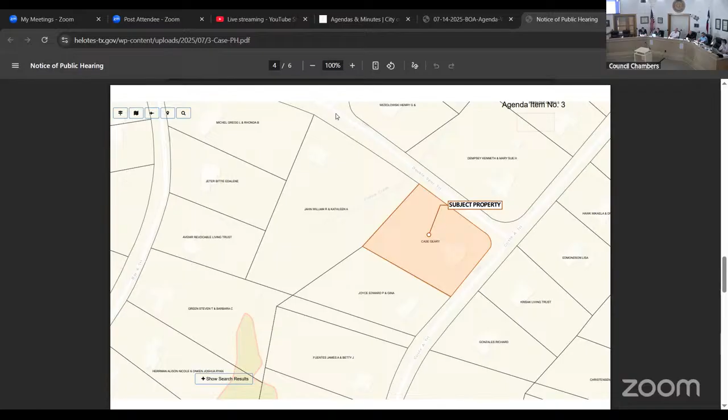Why don't, I would invite you to come up, state your name and address, and basically just tell us what it is you're doing and how we can help. I am Geary Case, I am the homestead owner and trying to get it finished to actually move in with my soon-to-be wife.

And I spent a lot of time there. It's 14111 Circle A Trail. So I see most of the city, I think, go through the road next to me with the detours. So I have a lot of visitors and drop-ins.

So I'm trying to bring it up to the current codes, because it's been there a long time. And I've done a lot of improvements to it that have been run through the board. My friend over here, Kenny Garcia, is the general, so he's helping out immensely. So that's roughly what we're doing.

So I'm just gonna kind of read it for the record. Discussion of an action on the request by Geary Case for a variance to the Municipal Code of Ordinances, Chapter 98 zoning, Section 9862, subparagraph C1, front yard setback, authorizing an encroachment on the required front yard setback of 40 feet on a single-family residential zoned lot located at 14111 Circle A Trail, Helotes, Texas 78023, more particularly described as BCAD property ID number 242598.

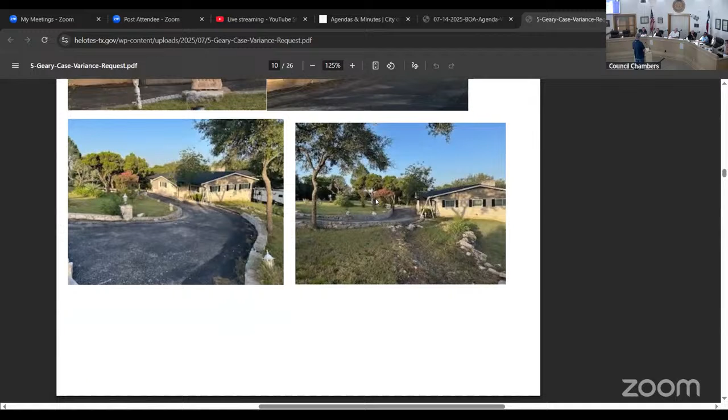I recently had a visit from SAWS, where they were coming in to do water metering, the meter installation. Unfortunately, their contract crew blew up the box, literally, because they were power washing it, and it disintegrated. And that was my box and my neighbor's box, a box about this big.

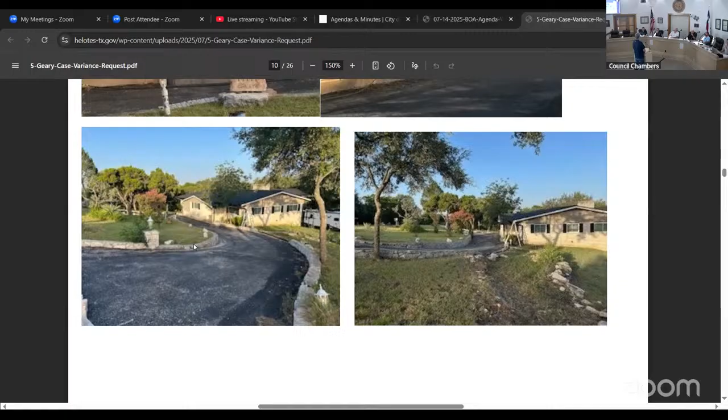So after about two months of discussion with SAWS, back and forth, I finally had a superintendent of installations visit me one day, and he procured a box. I'm not sure where the box came from, but it was a water box. And we got that put back together.

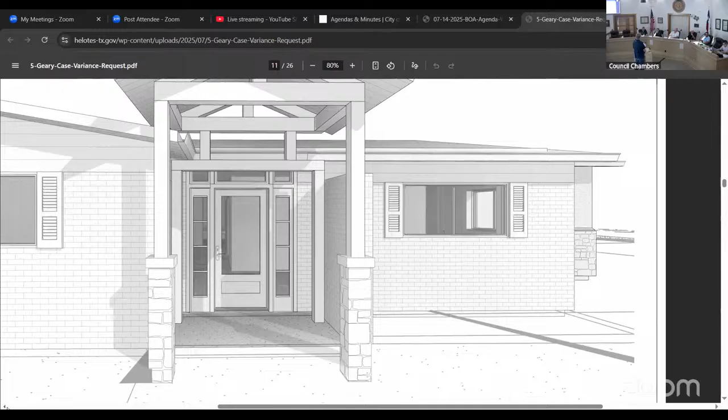After that, I was ready to go ahead and start having the system monitored for a while, because SAWS had put out some guidance that if you have old water systems, you might want to check them. So I had a reliable plumber come out and do that.

For the last couple months, we've been replacing every pipe in what was an underground system all the way, putting it aerial. So now we're ready to go ahead and do the other 2 rooms we were talking about.

Okay, roughly. So, as I understand it, you're looking for a variance to a front yard setback, because I'm looking at the architectural drawing. Yes. So it looks like you're basically kind of extending your entryway out.

Yeah, so if you look at the photo that's up there right now, you're gonna see this is what the existing plan looks like. We're basically gonna focus on the area here by my cursor. You're gonna see that it actually says 36 feet 1 inch, okay? So this is basically our property line, and based on what was submitted by the applicant and the contractor, they're saying that when they purchased the home, they were already under 40 feet, okay?

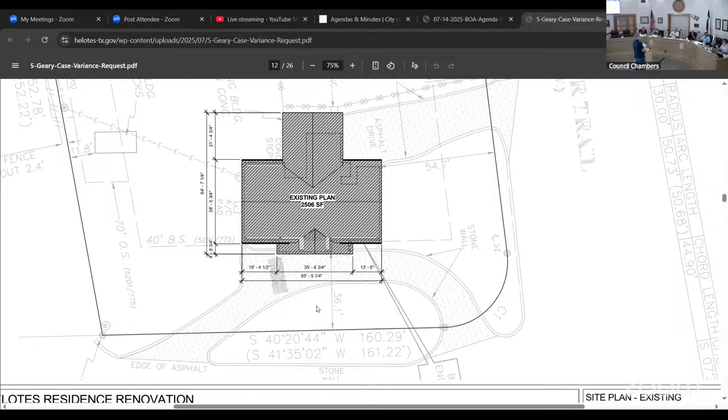So staff has diligently looked for a detailed sheet for this property. If you look, one of the pictures I do have is actually part of the plat. Forgive me, let me get to that page real quick. This right here - this is the area that he lives in. We've looked, because today's plats already have the setbacks written in there, but this was like 1960-something, I guess, right?

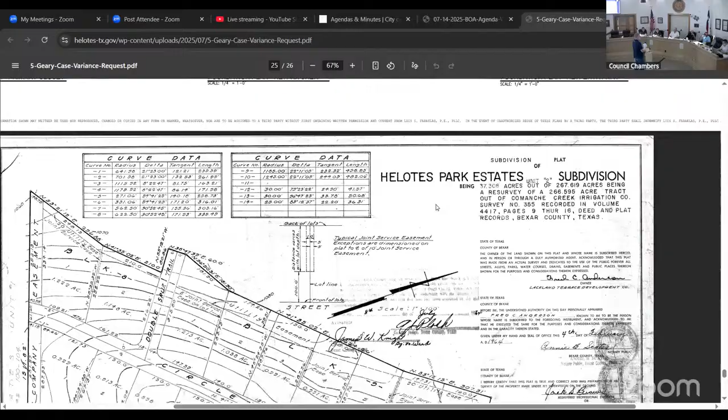So along with this sheet here would have been an additional sheet that would have had details, and it would have told you what the setbacks were. So we don't have that, and we haven't been able to locate that, because it could have possibly said that it was already at 36, or maybe 40 - we don't really know. So to his point, they're starting out with the assumption that it's already at 36, already under the 40, based on the prior builder, okay? I just wanted to point that out real quick.

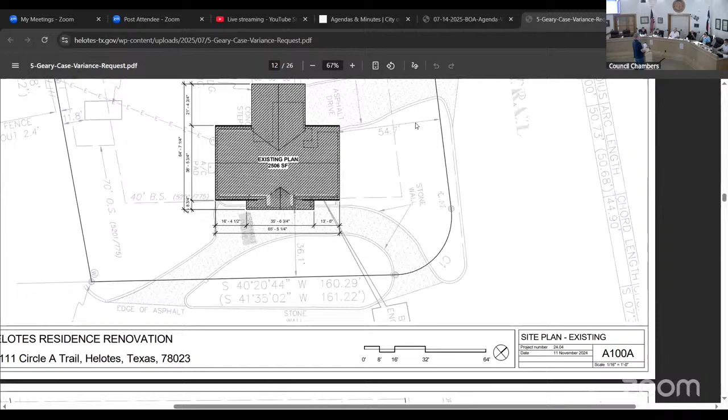Thank you. The home was built in the 60s, correct? Yes, correct. So that part of the structure, I guess, would be grandfathered now. Okay, right. So it's just something to take into consideration when making the decision, right? So if you look at this aerial view of the existing plan, you're gonna see this is pretty much what it looks like.

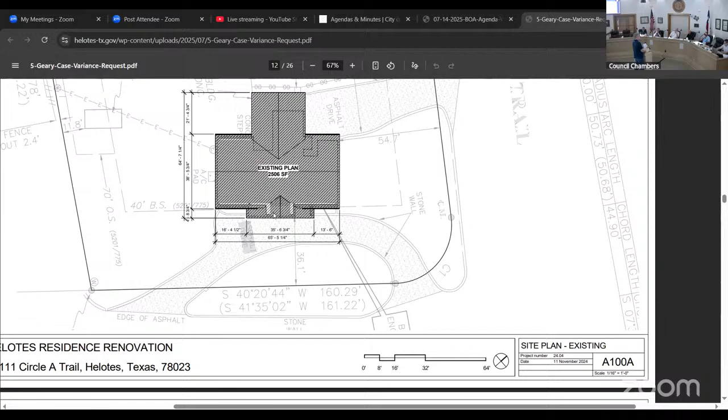You're gonna see that it says 36 and 1 right here where my cursor is. Let me know if I'm going too fast, I know it's kind of hard to see sometimes. Are we looking at the front of the house? Yes, right here where the cursor is, from the street. So this is the street right here, and he has a circular drive. Let me make it a little bit bigger.

So if you move on to the next thing, this is the renovation plan, and you're gonna see that it extends right here. So it's gonna encroach a little bit further than the 40 already. Again, we're under the assumption that it looks like it was only 36 to begin with, right?

And for the record, the only discussion agenda item is that new vestibule or small portico. It's literally this little section right here. Side setbacks are good, everything else is fine. So we're not moving the whole front of the house? We're just moving the porch entry. That's only what I think it was saying.

It's extended, and it's difficult to say exactly, like it's exactly 2 feet 11 inches or so, based on not having the prior knowledge of what the survey or property line proposal was originally. I believe the porch was originally open. I can show you some of those photos.

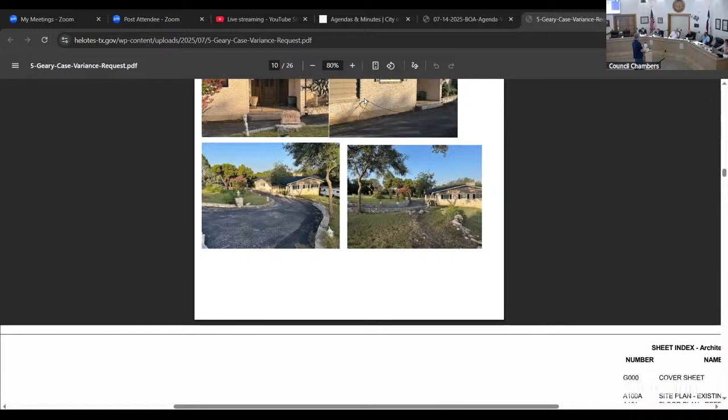Right now, what is the current distance from the porch to the street? Well, I'm hoping the contractor could clarify that, because if he's already at 36.1 and he's adding, let's say, 2 more feet, then it'll be, you know, 34? Okay, can we invite the contractor? I think that'd be absolutely fine, but did anybody have questions?

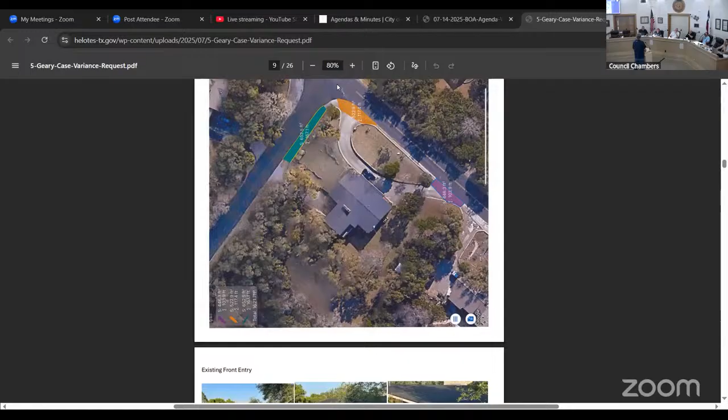Did you not have, how long have you owned the property? 2 years sometime this month. You got a survey when you bought the property? I had a surveyor come out because there was no survey available, so we bought it mostly as is. And we've been in the state of discovery, because...

When we started out, we had a house that had a gas water heater down in the laundry down below. It was just about lost. In the kitchen area, there was a 20-gallon electric heater, and that's where most of the heat came from for any hot water. So in the process of repiping everything, we pretty much re-engineered the water system.

The surveyor didn't give you a boundary survey when you bought it? Yeah, the boundary survey, but there's not much on it. It didn't mark the corners of the house or anything? Were you talking about that, not knowing if it's 36? Yeah, the boundary should show you. I'm assuming that they utilize this, like part of the survey, to create the rendering. But I guess the contractor can verify that.

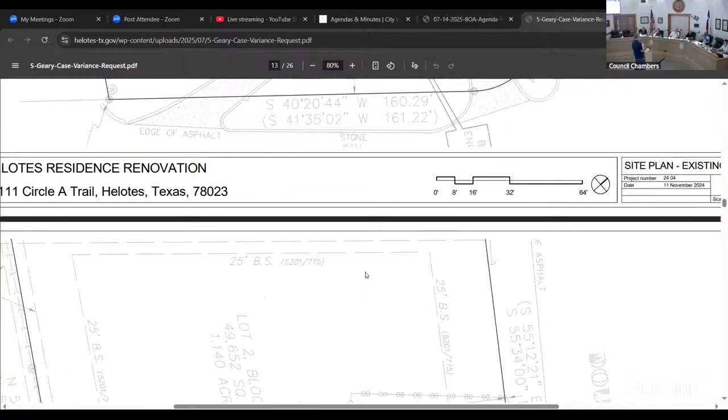So, I don't know if I'm jumping too far ahead, but what is the point of going further out? Is it usability, is it aesthetics only? What are you gaining from going further out? I noticed in your application you said you're okay leaving it as is. I just want to know if there's an accessibility issue, constructability issue, what is it that's causing you to want to? Probably a little bit of all of those features.

At one point, they've done a roof replacement. I'm not sure which one they did or when they did it, but they covered the porch that was originally open. I think it was open because it had lattice. So they brought that out, and you can see in the drawing. The drain structure of the roof was altered, and that goes with some of the height adjustment. They were talking about raising the height and had a rock ceiling at one time.

So they did those adjustments during that period, and they covered that roof. And originally, that roof, if you look at the front door, you can see where the opening is. They brought that roof straight down, and it actually cut off the top right-hand corner of the front door. All that wood is still up there. And the roof used to go from the right all the way to the left wall and come out, because that was the drain system there. So part of the roof structure, they modified the draining structure.

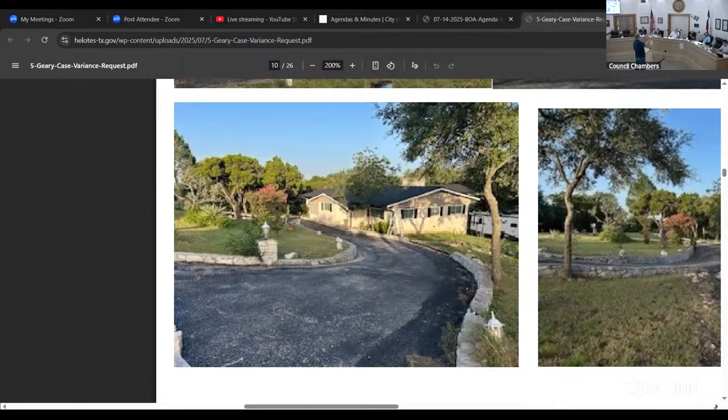One of the reasons the draining structure doesn't drain correctly is that, all the way to the right, the dirt is above the level of the floor. There's about 8 inches of dirt outside the bricks going into the dining room, which I discovered when I started taking the floor up because it had an odor from getting wet.

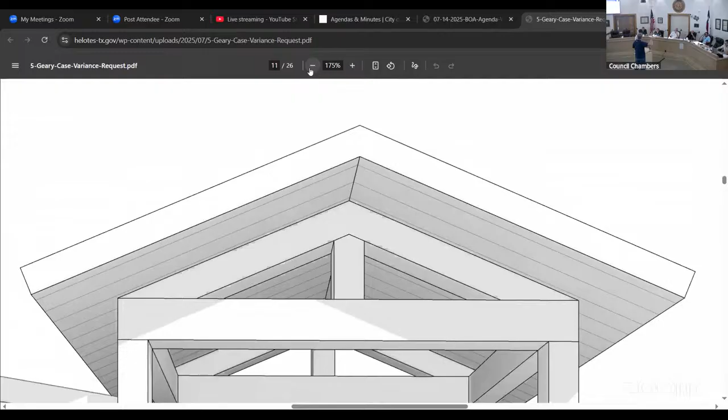So one feature is to put the drain back like it used to be, and put the other structure in, similar to what you see all over town, mostly in commercial places, but it's just a small lift. You extend the roof out, put drainage up there and underneath to catch the water coming down, and re-vent it to where it needs to go. Otherwise a lot of the rain runs down the street. There's a culvert at the end of the house that goes all the way down to the end of the property.

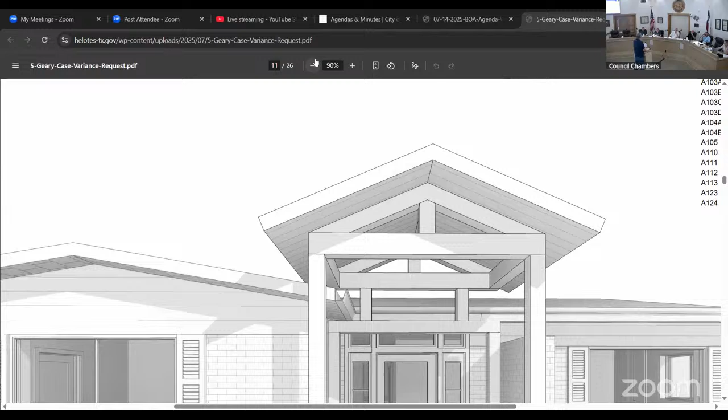So it's really two features. One, to make it look prettier, and nobody's had a problem with that—they all like it because it's different. Two, it fits right into the structure like it is.

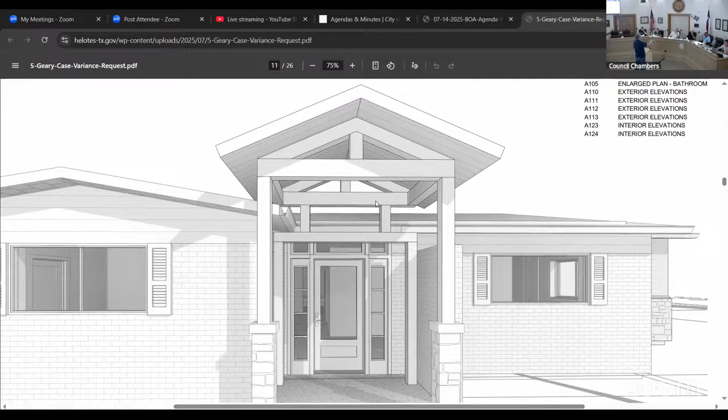So we brought it out to the front to give it a little feature and move it 2 feet out into the street. It's a little tight there, but it's holding the front part up, and the back is going to come down in the existing patio and be supported. We moved the drain structures in so you can support the roof without having to tie it all the way into the house, but it is tied into the right side.

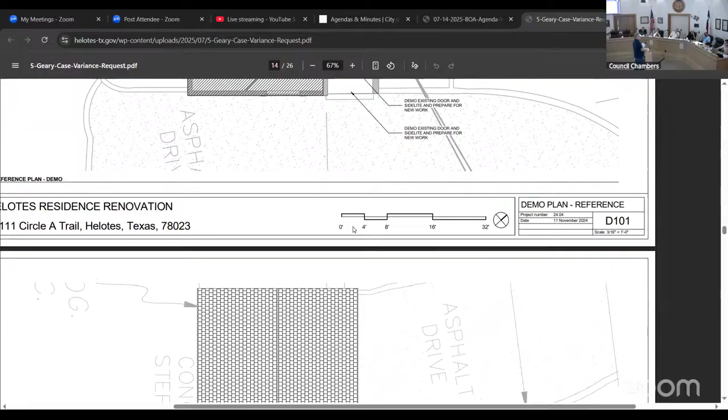Michael, can we go up a little bit? Right there, that's good. So if you build this as proposed, how far into your driveway is this going to extend? Two feet—well really, it's about a foot and something, because the drain will go back behind it on the left side. On the right side there'll be 2 places it drains out, going straight down, then into the existing driveway, and it exits down on the left side of the property.

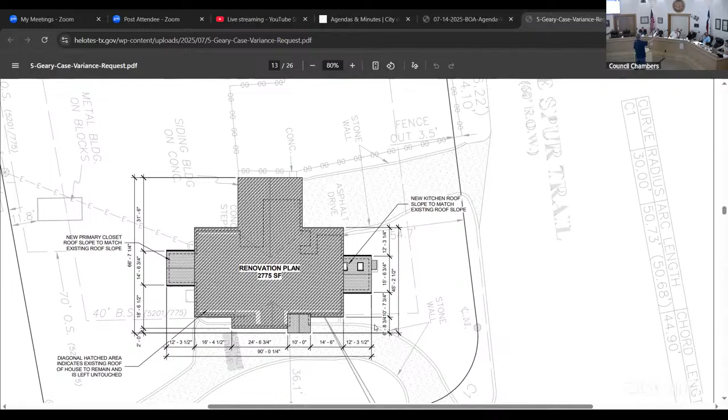There's a history with the property: on this left wing at the front, that's where the water used to go. The water went from 60 feet in the left-hand corner all the way across the rock banks and down, coming in the front, where the only hose bib on the front of that house was. It was also where the water came into the house. So as part of all that, all the plumbing that was in there in iron is now capped, and everything is run up.

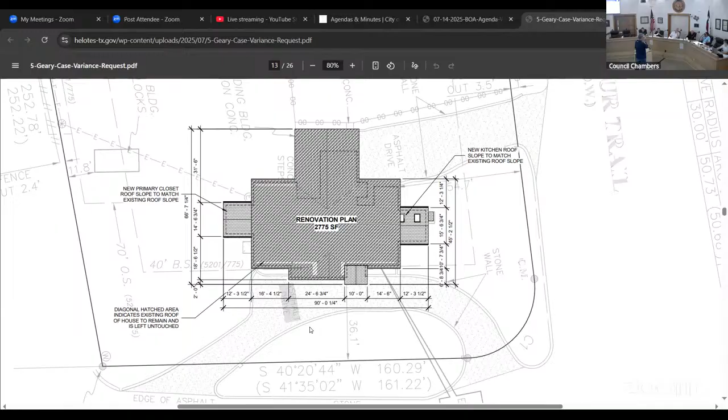So just to capture some detail, I think the last drawing in the group is the topographical map. This property—if everybody hasn't been by it—the front street is much higher than the property itself. The driveway drains all to this entry of the house, and it has rock walls on each side of the driveway that carry the water that direction.

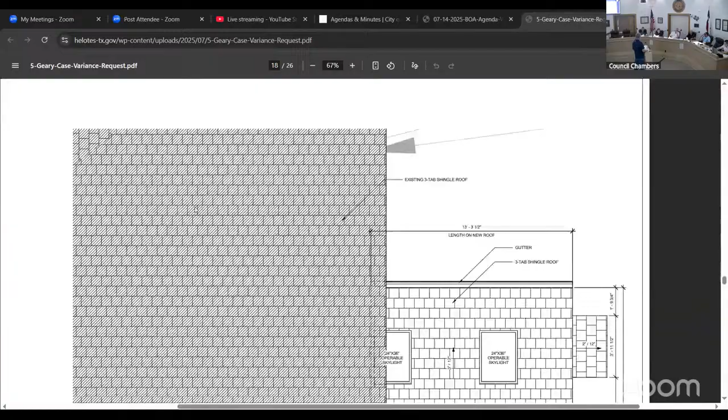The property continues to drop in elevation as you move from the front of the house to the back, and the change in elevation is 1.5 to 2 stories by the time you get to the back of the house. It's real dramatic, the drop off. So you can see why the original house was pushed so far forward on the property.

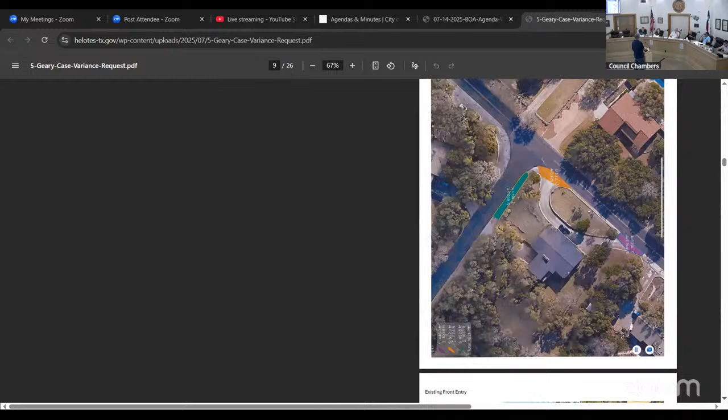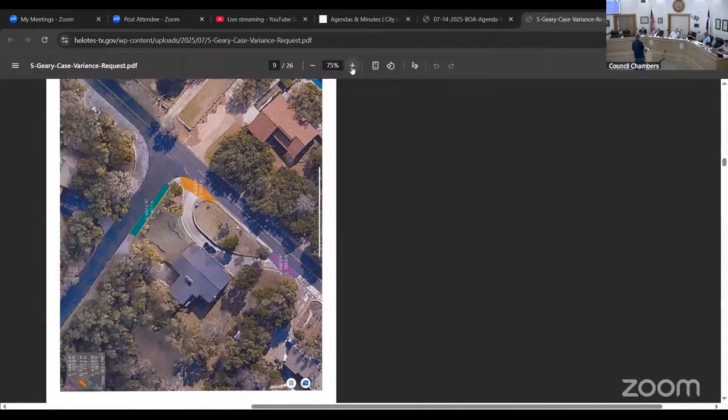The house doesn't have a pantry—never had a pantry. I think it had a room that served as a pantry in an adjacent part of the house, away from the kitchen.

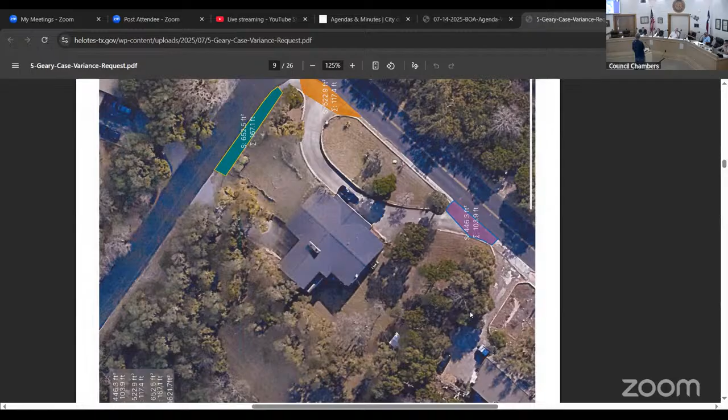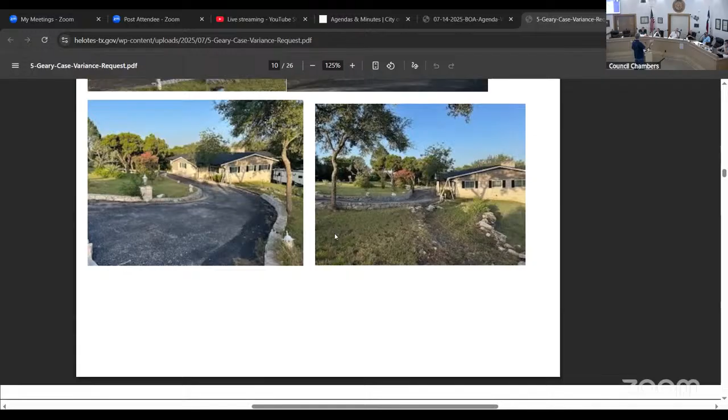The water heater is all the way down in that back area, so all the water had to come up a story and serve it, which most things this type now would make that, or they put enough pressure in it. So the house has been literally 100% replumbed, and when we get to the 2 new rooms, they'll be plumbed from the same system. It's all brand new.

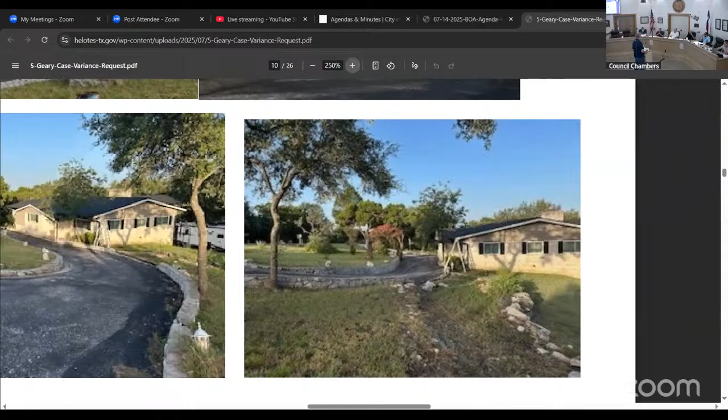Okay, do we have any more questions? Just one follow-up—through the images I can see that architecturally you've done something here that's aesthetically pleasing to most people, probably. I like the way it looks, but my peer asked about accessibility, future access for elderly, things like that.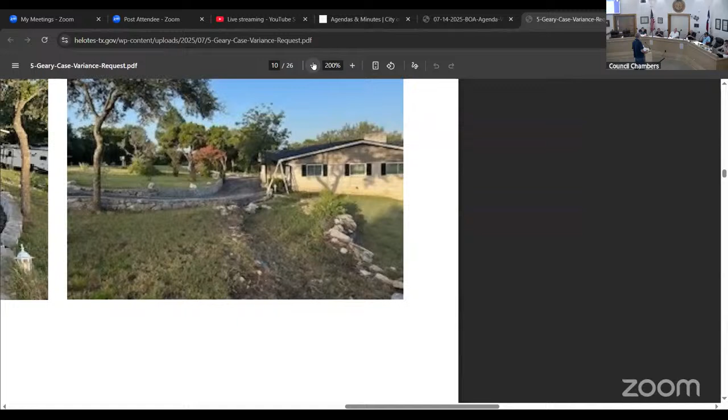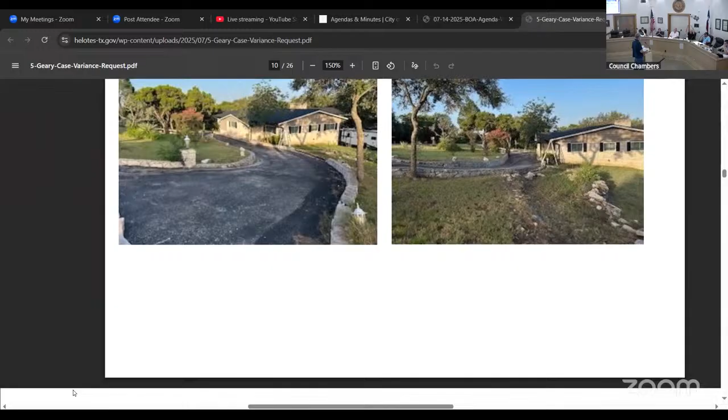You did mention that—it's a little bit of all of that. I can see that the front posts are pushed out about 18 inches from the existing patio today. That's the only piece of the structure that touches the driveway, those 2 posts. And the roof ahead seems to be so far up, it's not going to get in the way of vehicles coming through or anything.

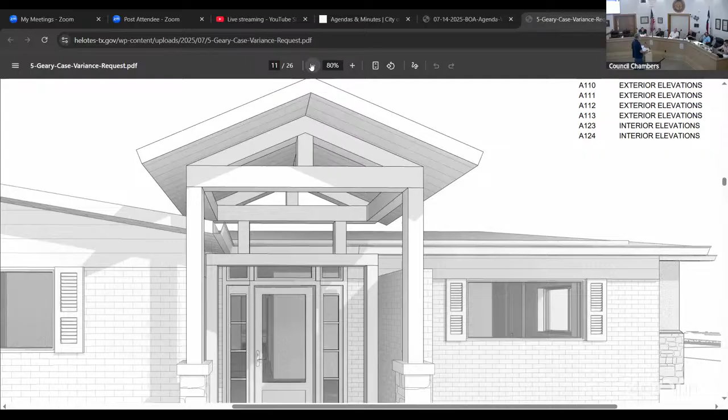The question really is, do you feel like that new structure will give you better access in the future, or give visitors, possibly wheelchairs, more room to move within the front of the house to gain entrance or exit? In the process, that's one thing you haven't seen drawn yet. There's one step built into that.

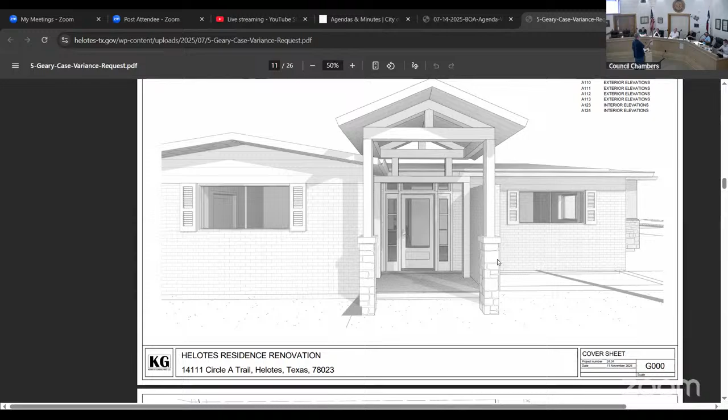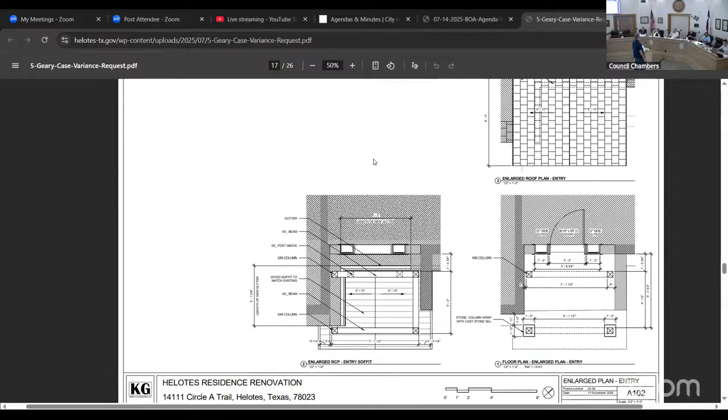Bringing it out to a second step would give more access. Plus, it can be modified with ramps, so the inside of the house has been modified. At the back side of the house, there's a very narrow stairwell that goes down to the carport area. That's all there is in there, and its only purpose was to come up, and it's got a locked door which needs to come off.

So this is the main entrance and exit from the house today. There are two others when you get into the living room, because the living room and the master bedroom both have access to the back patio and the upstairs and downstairs.

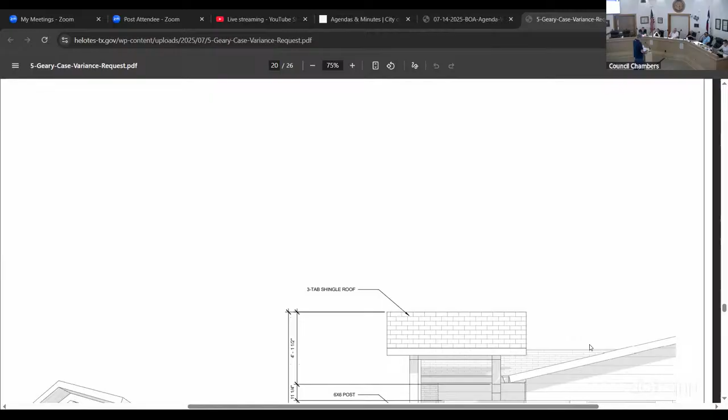So there are more ways to exit it. It's not the most convenient. How wide is the driveway? That driveway is about 10 or 12 feet, let's call it 12 feet. It can be tight for a big delivery truck, with the trees and everything else — you've got to navigate your way through it.

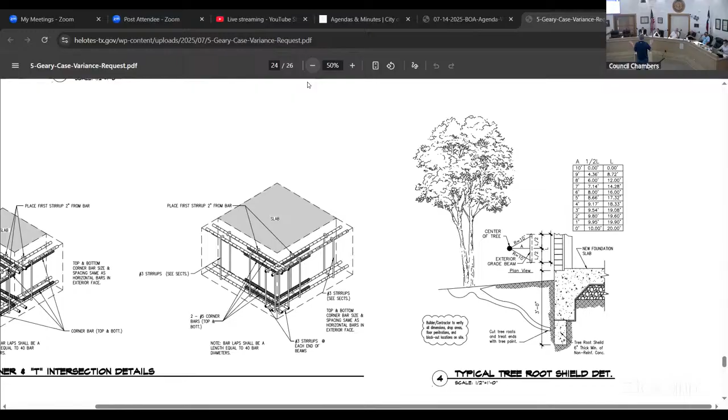It's accessible. There's two ways, the 2-lane wraparound.

In the event of an emergency, have y'all verified for, say, an ambulance? I know a fire truck wouldn't have to get that far down, but if that's the main entrance, it didn't appear in the pictures that there was any real accessible area to the other part of the house. Is that gonna cause an issue trying to get an ambulance that close, or would first responders have to go from the street a lot further up and back down?

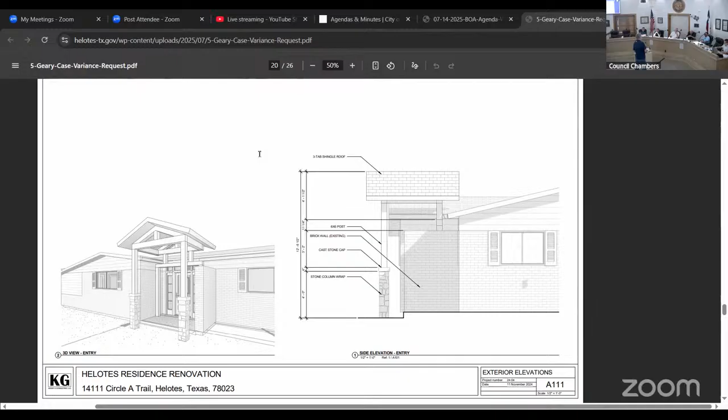Well, at the second level, you've got a double wide entry. Yes, but to get from the ambulance and gurneys and everything into the house, has that been considered in this? That's still gonna be something that can easily be done?

Can I say something? The ambulance has been down there when Charlie Garcia lived there. He had his heart attack and the ambulance was down in that house.

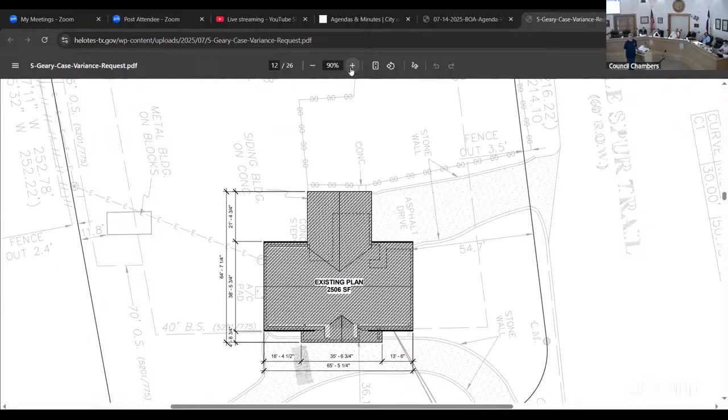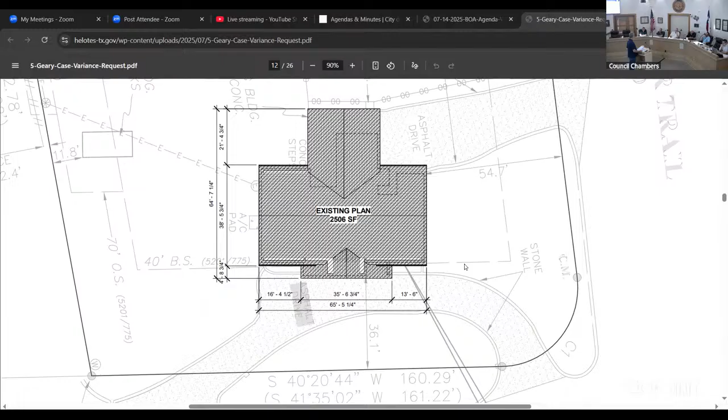Okay, thank you. There's room to adapt that entrance. I would be happy to adapt that entrance, simply put, because it's not the most convenient driveway. I know from the Garcia family, they had lots of visitors all the time.

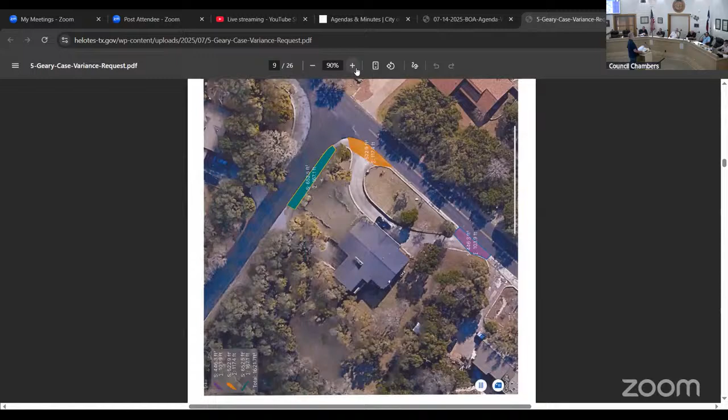One thing I did do was — the purple area, the orange area, and the green area — those are the easement areas. They were dirt, and all of those areas had 1/8 of tar on them and then gravel.

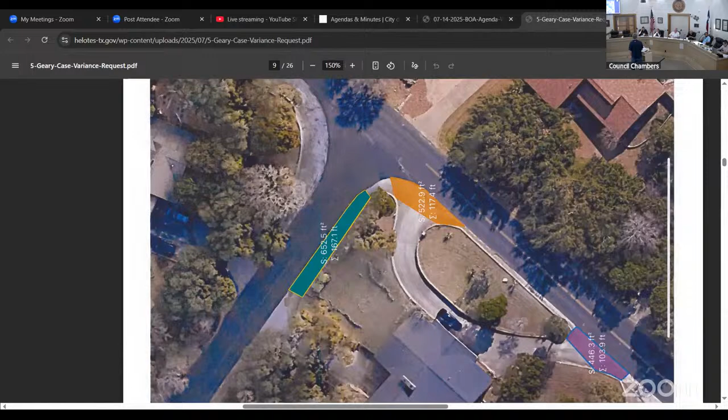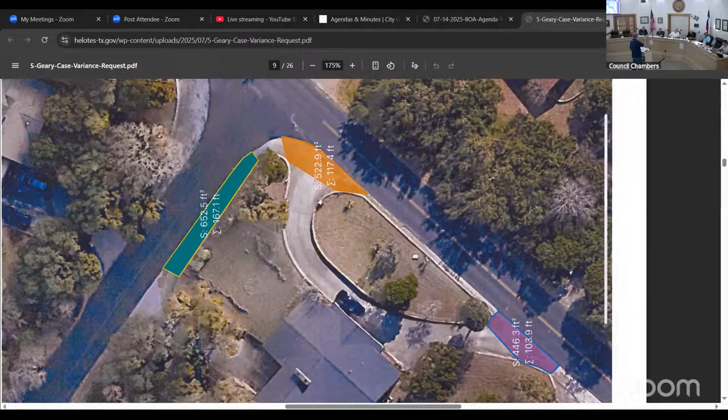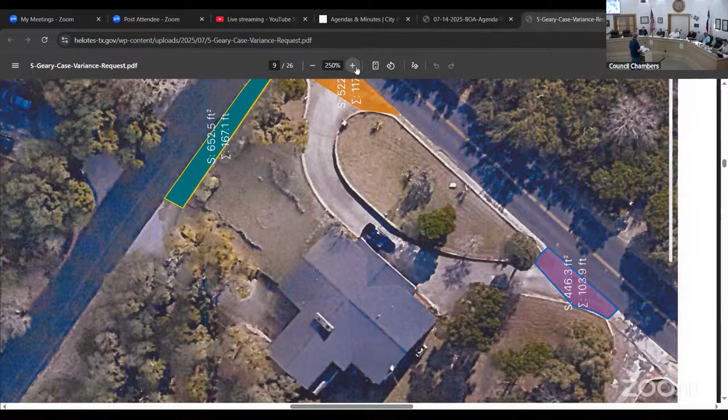Which I believe everybody is happy to see, because it makes it easier — easier for the school bus to get around that goes around the corner every day. So it's very accessible. Only you can see the car — it's really a one car down in that level.

I'd be happy to knock part of that wall out and make it wider. But right now we're here arguing — graciously, but arguing — about the things that can make it better. So there's plenty of opportunity for that. It wouldn't take a lot, I don't think.

If you look, you can see where the pitch of that porch is, and it's already widened up on that. You come in from the purple angle. It wouldn't take a lot on that retaining wall, on that island, if you needed to do that — it'd be pretty simple. You'd raise it up above that, accommodating the way it was originally built.

And when they made the modifications, what you do is bring that structure up, make it a little deeper back in. It's not going to be attached to the roof — it's going to be over that roof.

Put in the drainage systems on either side, replace the drainage on the lower side, and then it's all going to run a whole lot better than it does. So that's the plan.

Any questions? No, okay, I guess we can just go and close. You guys gonna make a motion? If we could get a motion to close discussion, then we'll have to do another motion after closing. So, is there an opportunity for the general contractor to speak, or can we ask questions of the general contractor at that time still? You could do it now, prior to. Okay, thank you.

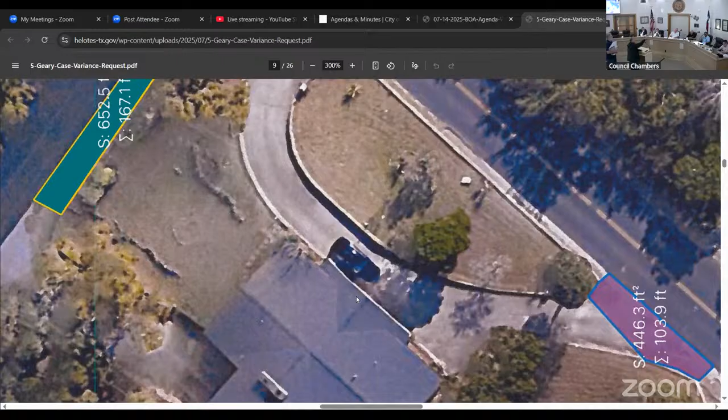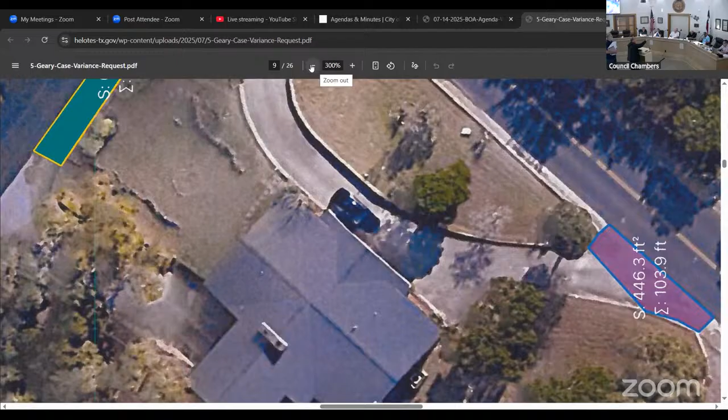If you don't mind, number one, if you see that black truck, I think that's an Expedition, you can see it's got pretty good width on the driveway there. But then number two, if you can go to the pictures of the house, the front door, the front porch.

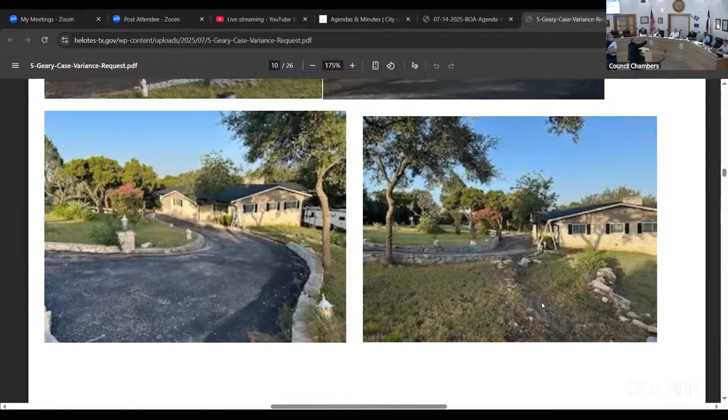Right, let me see, maybe one more screen. A little bit higher, if you don't mind, please. You can see right there by the front porch, the picture on the right, that the sidewalk - if you don't mind going down one, please. I think down one, right there. Here? You see that, it's already popping out.

That step, I'm just guessing 18 inches or so. So we'll be bringing it maybe 6 inches more than that, or we'll cut that out and support it structurally. But it's not like it's eating into the driveway - you're not going from the slab, you're going at this point. Right, like right now, the slab there is already, I'm just estimating 18 inches.

And if we're going 2 feet, it's - and add 6 more inches. Right, not a full 2 more feet into the driveway. So that's all I wanted to point out. And if you had any questions for me, I'm glad to answer anything.

Have you put a tape measure and measured from the end of that step to the street? No, sir, and I wouldn't even know the exact setback - when you say the street, are you talking the street, not the driveway? That's the difficulty here, is in that neighborhood the city-owned easement in the front is considerably wide. Right, and so the property line itself is typically 14, 15, 16 feet off of the asphalt.

But I think the setback should take that into account. So when we talk about 40 - right now we're talking about a 40-foot setback. The setback is measured from the property line itself back to the structure, and then in front of the property line the city owns a considerable right-of-way we don't have a measurement for. It's usually used for drainage and stuff like that in most cities, so it might be 55 feet, it might be 50 feet from the actual street. So if you have any questions, please ask me.

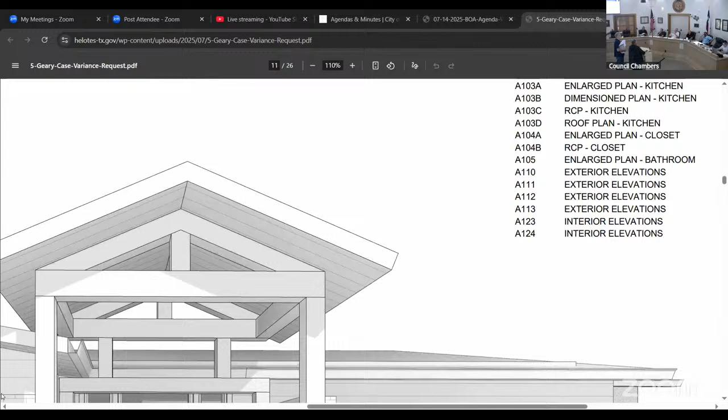How tall is that structure actually gonna be? Oh, I don't remember, I'm guessing about 16 feet, but I'm just kind of guesstimating, at its highest point. About 16 feet? Yeah, the front - it looks twice as tall as the front door, but I'm just eyeballing it, I don't...

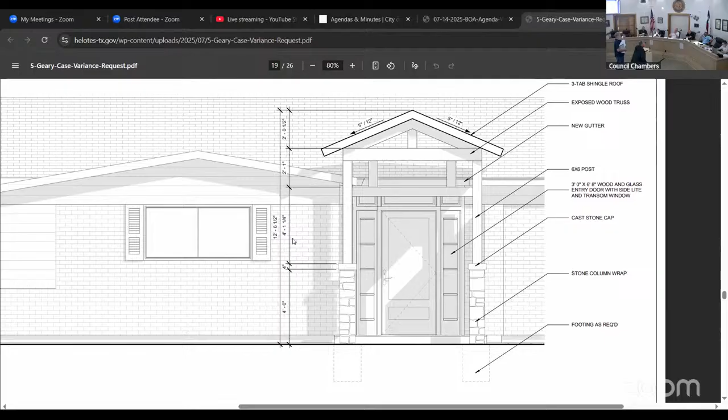The door is 36 inches wide, built in the 1910s or so, it's a single pane, quite old. And at the top, does it show it? Right there - at the top of the door, the roof framing starts there. We initially wanted to bump it up a little bit, but I think you probably have about 6 inches, you could add another window there if anything, but it looks like that's it right there.

Can you see, is that 17? 12.6. That 12, what's 12.6? Plus 4, or not? No, that should be your total. 12.6 - this is showing total, yeah, so 12.6.

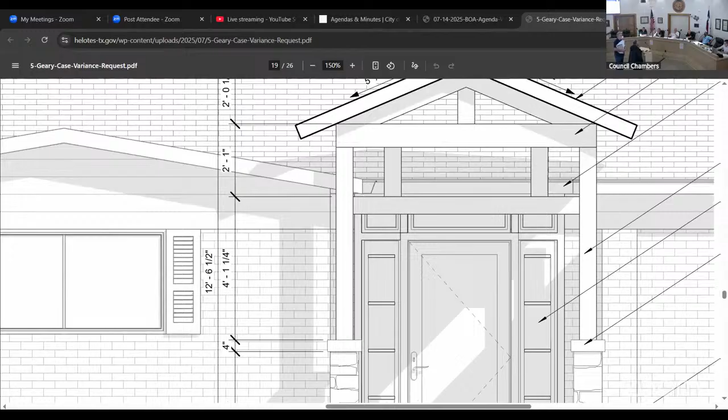So it's not even going above the peak. Scroll up a little bit, you can see the top of the roof. There you go, yeah, it's below the peak of the main roof. Correct. So right now, it does not exceed the peak of the house. Yeah, right, just that area.

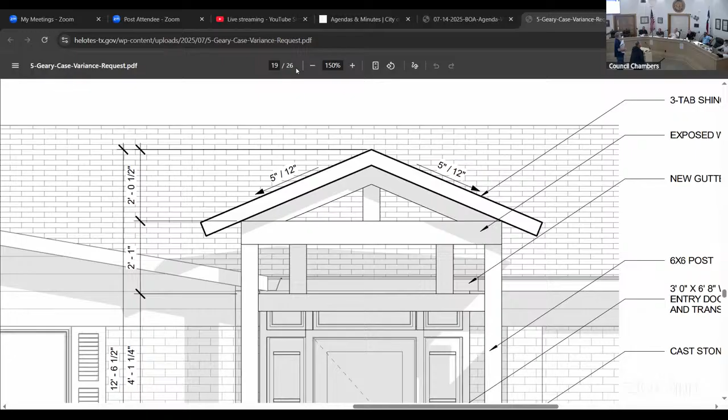I mean, it can be adjusted. The concept was to try to do something about this and get the drainage. You can see where the roof starts, the draining coming back over right above where he is, right to the left there. Yeah, so I can see the existing roof line on the older part of the house.

Yes, gutter in the front, and gutter that's going back near the door. And gutter cutting across left to right, because the gutter to the right going across used to go all the way across and come out. And so the new design, did I hear you correctly that the two vertical supports in the very front

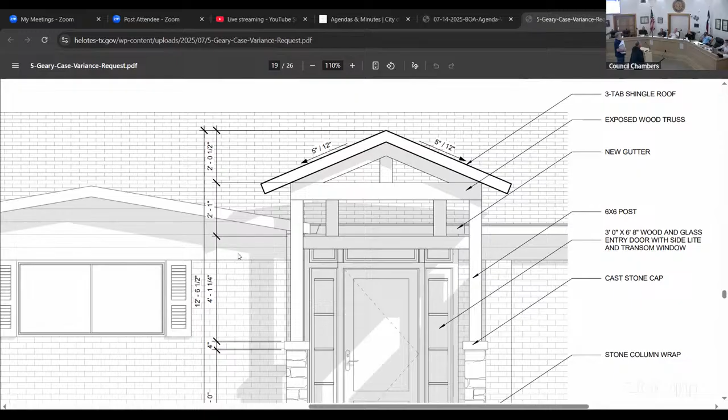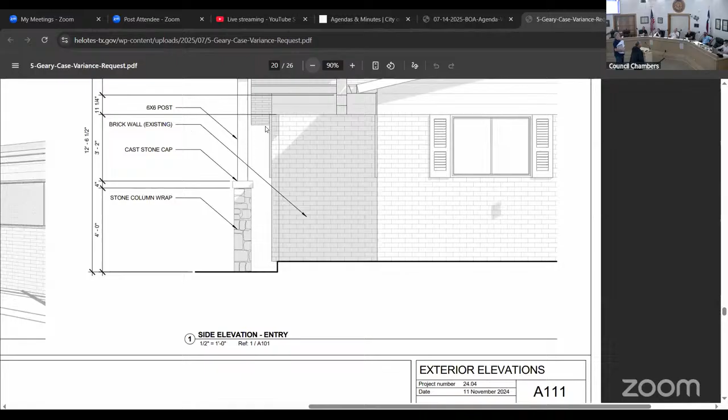I think I've asked all the questions I had. Okay, I don't have any. Thank you. All right, thank you very much. Thank you. Okay, so we can go ahead and close the discussion. Motion to close the discussion. Second.

Okay, can we get a motion to open to discuss amongst ourselves? Motion to open? Second? Okay. All right, let's just kind of go around the room. We'll start here. Just talk, what are your thoughts?

I'm looking more at drainage. If it's built for drainage, I can see how that could be positive to change that up. So that's kind of the thing I think is the most important part of that. Yeah, I agree. I think it addresses his drainage issue, which was obviously something done before he bought the property. I think it's aesthetically pleasing.

He's got his neighbor here who's gonna see it, and I think it looks good. And to the contractor's point, it's only bringing out those posts another 6 inches or so. I don't really have an issue with this at all.

Sure, yeah, I'd just parrot the same comments - with the local neighbor who's been there so long and no one else responding negatively, you've got support in the neighborhood here. And again, 6-inch movement on the base level, and the overhang is way up there. I don't see where this is gonna cause a problem for anybody. And I don't think we're setting a crazy precedent by saying, hey, you're asking for a 6-inch movement

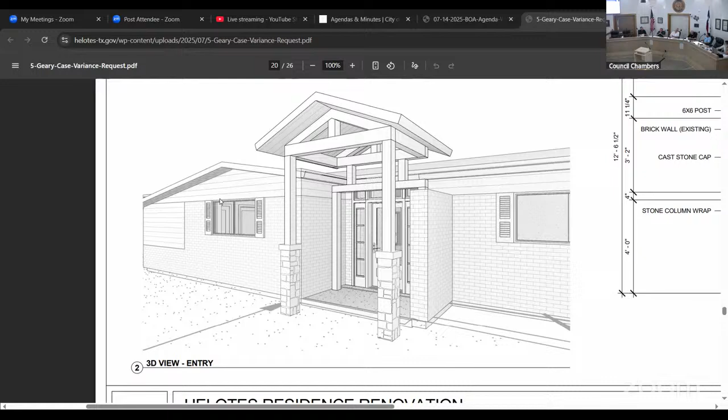Well, that's the question. So again, how wide is that driveway? I mean, we're just estimating like 12 feet. I don't have any exact measurement. Okay, 12 feet. You said 10 to 12, right? I'm so sorry, I think earlier when I asked the question you said 10 to 12 feet. No, I think... Okay, you said that. So let's call it 12 feet. Did I make a mistake?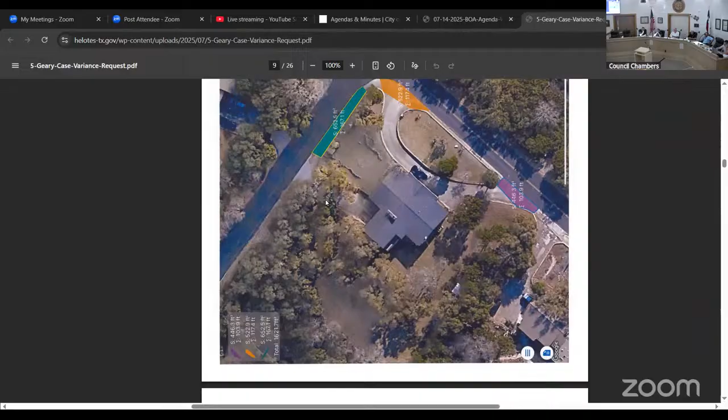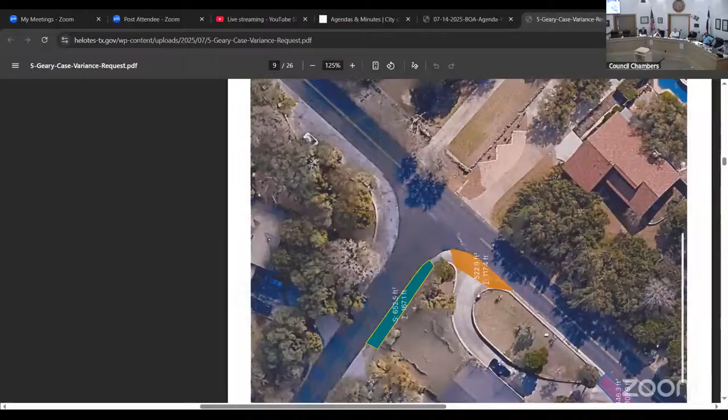I would love to widen that by taking some of the distance between the uphill part of that to the street. In other words, squeeze in, to your point about a drive-through, or at least something wide enough to get another vehicle in there. I'd be happy to do that and just build a sidewalk up to the street. Okay.

So the question is, do we want to approve, how much of a variance do we want to approve? That's ultimately what it comes down to. Trying to put some words to it, because the variance request doesn't give us a numerical value currently. Looking at the architectural drawing, the roof part, and that's normally where the variance is measured at the closest point, so the roof hangs out the closest to the street. I think that this variance is somewhere in the 3 feet to 3.5 feet range right now.

So I would propose that we put some words that say we approve the addition of the patio cover structure not to extend beyond the width of the driveway and the existing rock wall that's on the other side. Not to exceed again, and that allows the owner and the builder to come up with what works best for them. Exactly. Okay, I think that sounds reasonable. That makes sense to me. Yeah.